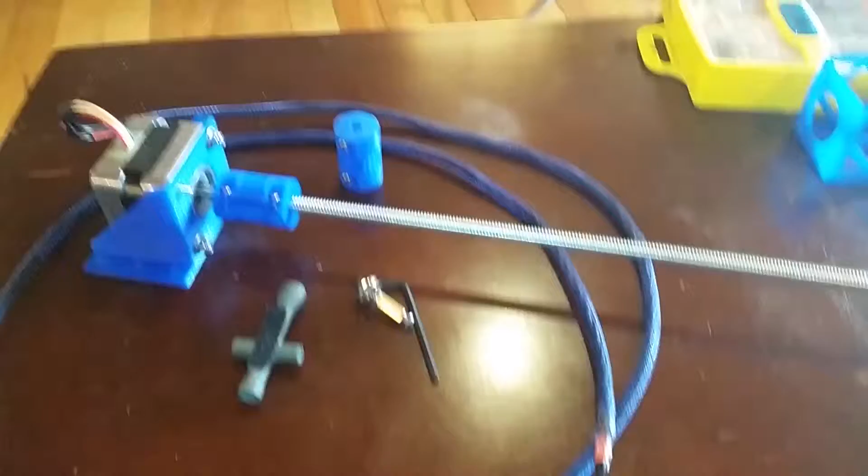You may have seen, or I'm not sure if I put the video up, about printing these couplers. They're just PLA, and they might actually be too strong in the middle. I might have to revisit them and make them a little bit flexible. They're just held in with some M3 machine screws, and I haven't even put the capturing nut on the back side. There's actually enough friction right now that it's plenty tight for this mock-up.

What I did make was a motor mount here, and somehow I lucked out and got the tolerance perfect so that this motor will almost stay in just under its own friction.

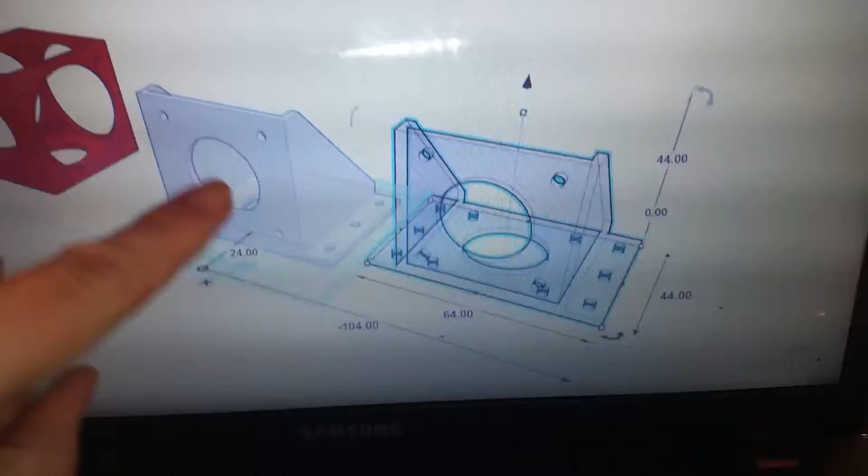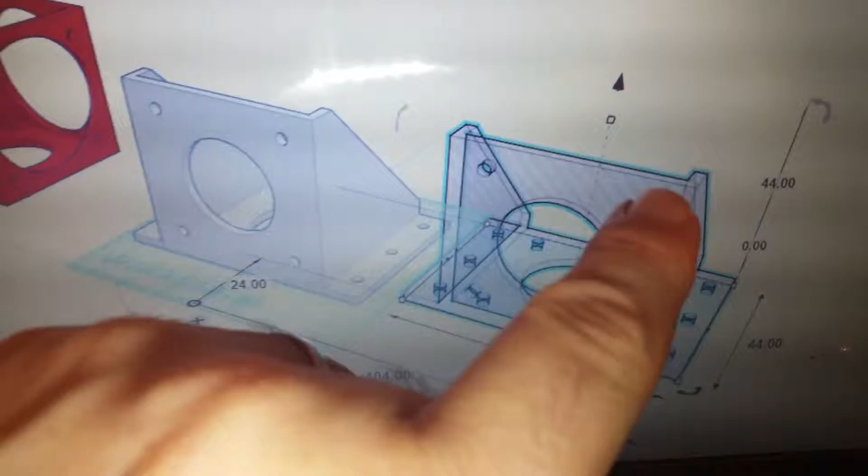And that part here, I'm just going to come up here - you can see that's the solid shape, but here you can see the base is pretty much just a flat piece that I brought up some sides on. Based on an earlier part that I made, this is the dimensions of a NEMA 17 stepper motor face on all sides, and then I just used that and stretched out some extra sides, so that essentially the middle part of this is exactly the same dimension as that face, and it just worked out to grab my motors perfectly.

So I'm not going to spend too long on that, because that's the actual part there, and it seems that it will hold the motor just fine. The wall thickness is 2 millimeters at 20%, and it's plenty strong. That's Flash Forge Dreamer Blue PLA.

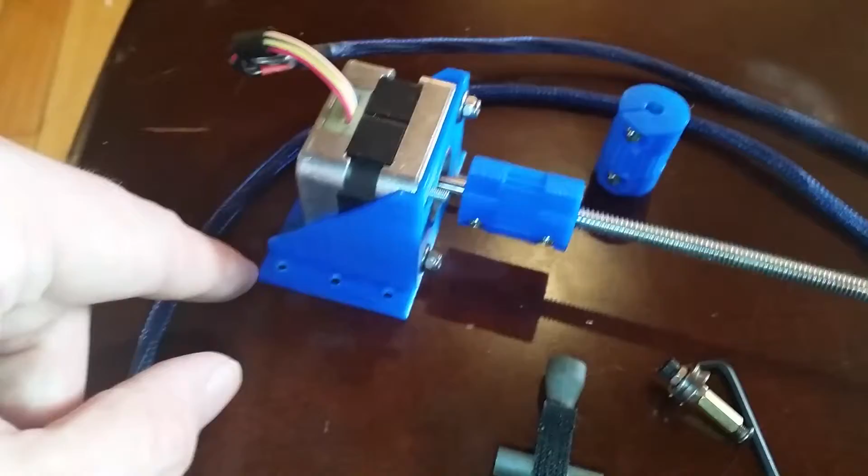I'm going to have to do some tests with it, but as you can see, I just put in 3 M3 mounting holes as well on the base.

The original cage that I did for the sizing was this, and it's exactly the dimensions of the NEMA size NEMA 17 stepper motors that I have there. And this I had bolted onto the face of that motor before.

I realized it wasn't going to work for allowing me to tighten the bolts and whatnot, so I just redid it with this. It's really solid, so I'm hoping that it'll be plenty fine for driving the Z-axis. And of course, there's going to be 2 of these, so I've got to print another one.

On my little Fabrikator Mini, these take about an hour and a half to print, so I'll be doing that at a different time.

Something else - I know we showed this before, but I'm not sure I showed this part. If you notice, there's some vertical lines in the hole on that side. Focus, you silly little camera.

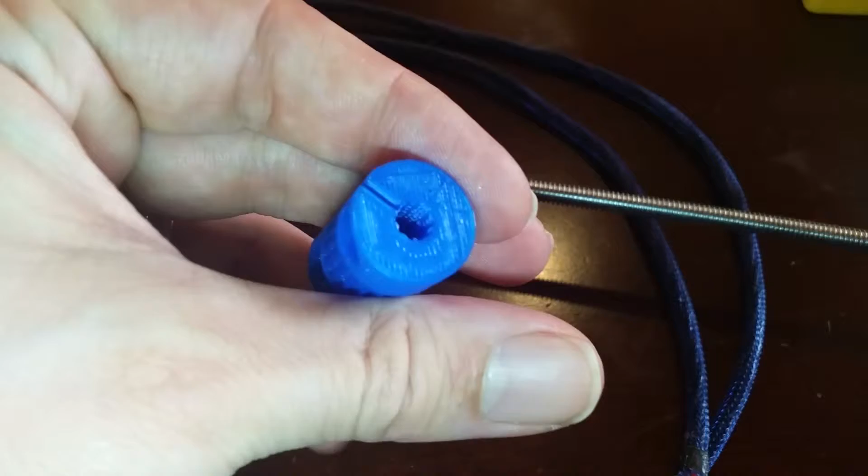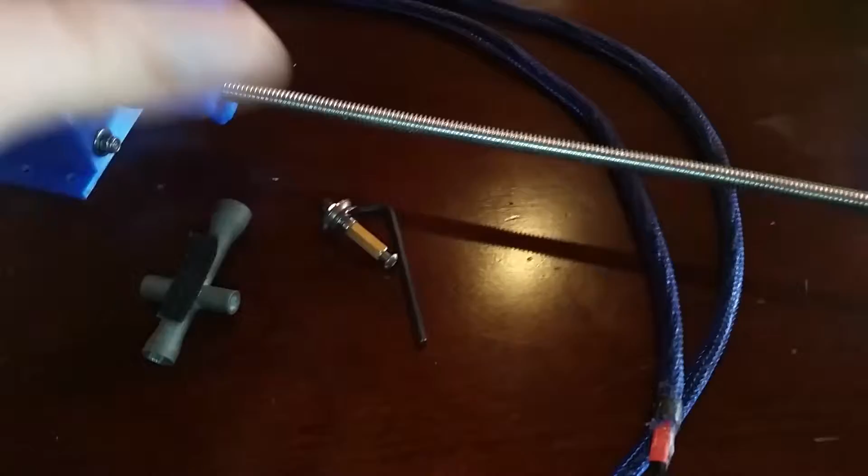Those were done to help the threaded rod - the threaded rod sometimes would back out. Once I put those vertical lines, or parallel to the axis lines, in there, there's a bit more of a crush or a deformation into the threads on the threaded shaft side, and it stopped that altogether. It makes it nice and makes a good clamp here.

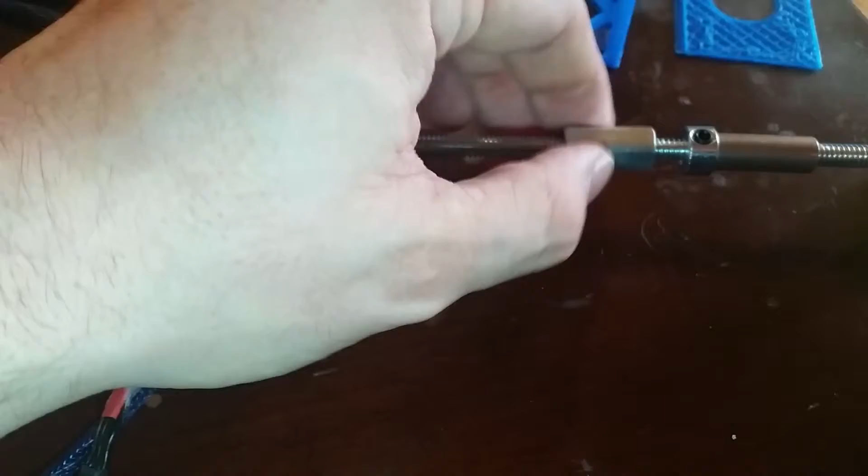Now I'm hoping to get a part that fits directly on this coupling nut up here, and that will give me a plate that I can mount what will be, I guess, the X carriage. It'll be one of these threaded rods on either side, and then a smooth shaft behind, and then this will move the X-axis up and down.

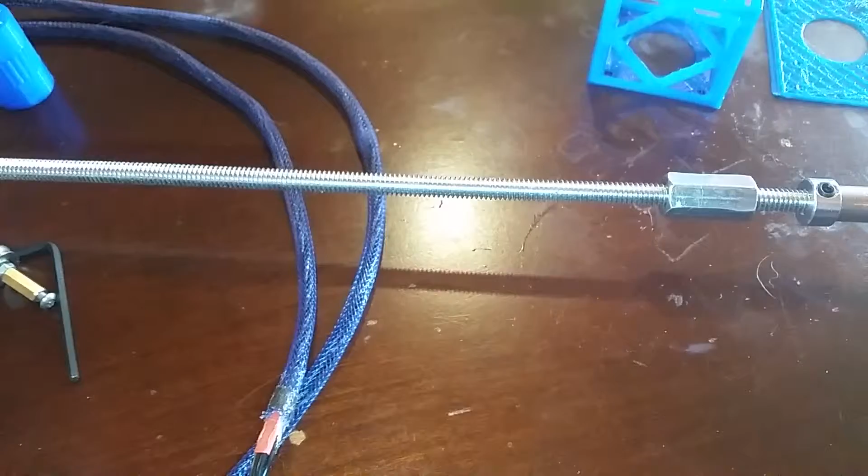So I'm going to have to figure out how I'm going to do that, because there's still a possibility that I'm going to use my L-channel aluminum extrusion kit to make the X instead of using smooth rod, just for, you know, a chance - just give it a shot. I do have some smooth rod, 6mm and 8mm, salvaged from printers, but I think it'd be neat to try and do it with the L-channel.

Now the other thing I have, let's hope this will focus here for us. Don't know if I can hold it still enough. Let's see if we can get it to focus. I might not be able to hold it still enough though.

These are V-groove bearings, and they have an M3 gap, where their center is made for an M3 screw, which I have passing through there, and then just on a little M3 standoff. This one I've already checked runs perfectly fine on the aluminum extrusion peak and on the edges of things, and it's an actual ball bearing, and these ones came pre-greased. I think I got 20 of them for like $2 from China, so we'll have a look at that later.

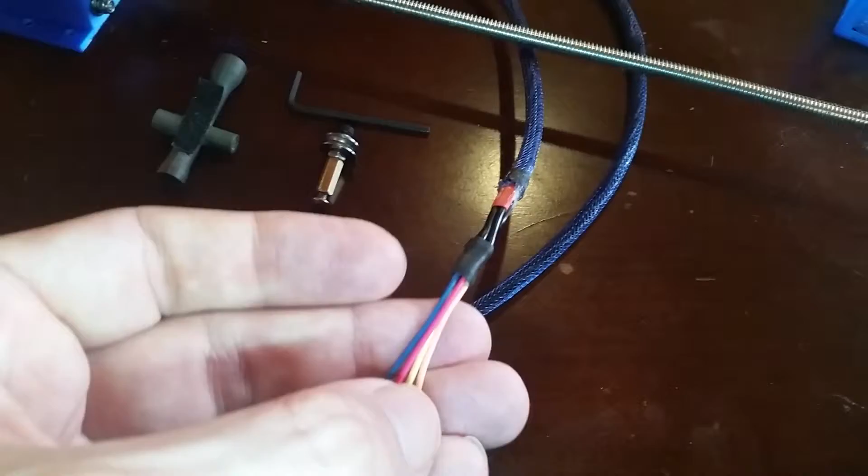Just a small update. Another thing I'm not sure if I showed - I extended the permanently fixed motor wires that were on the motors. I extended them, and they were also wired with the coils in a pattern that didn't match a RAMPS board, so I just repinned this header down here to be the coil pattern that matches a RAMPS board to make it easier.

Then I put the wires together, and I didn't have very good wires when I first did this for this motor. I just had some generic black cord, I think they were just some general purpose speaker cord.

Let's see if we'll get it to focus here. It might focus here in a second for us. Maybe not.

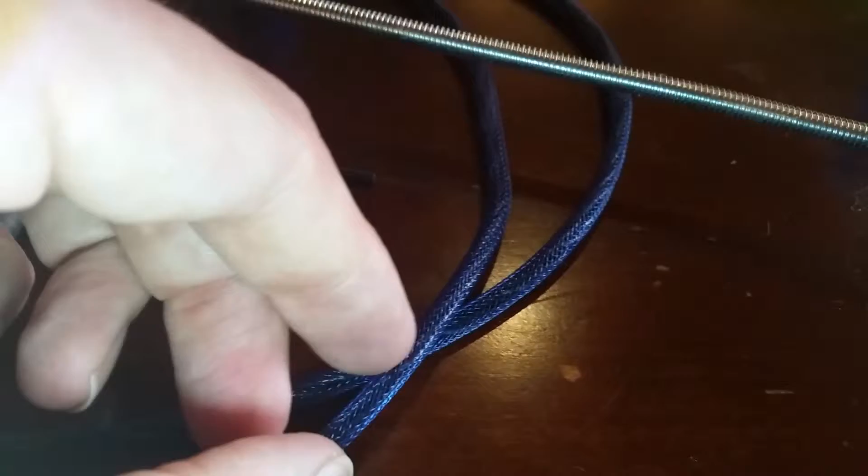I didn't like the look of how they were going all over the place, and I had some of this nylon - I don't know what this stuff was. It was at the dollar store for $1 for 10 meters, and it's like a herringbone tube of nylon mesh, and if you stretch it, it pulls right down on your cord. So for $1 for 10 meters, that was pretty good.

It gets quite wide if you wanted to, so I'm going to have to look into other uses for that, because I was buying some wire sheathing before that was like 20 times that price. It's pretty much the same stuff, just this stuff comes in all kinds of funny little pastel colors. The stuff I was buying from the hardware store was just white, like nylon looking.

But anyhow, I will get this hooked up to my test stepper driver upstairs later today, I think, and just double check it's working and there's not too much weird run out or anything with this.

Like I said, I might have to make a new version of this with the center point with a bit of a relaxing spring, which is why this little fella here might be needed, because if this has flex in it, then you're going to get some error in the height. But if you use a coupler that's pushing against the bushing like this, then there should be no vertical errors when this turns, or no vertical backlash if there's any flex.